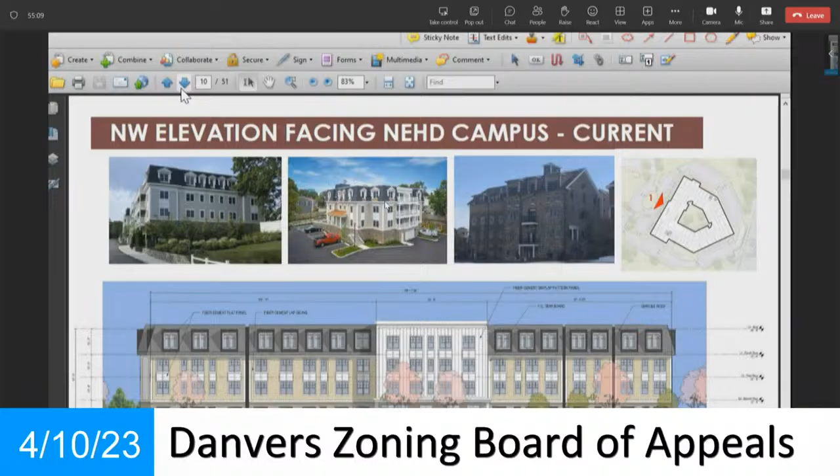Now we're moving counterclockwise. This is where, left to right, you see the 4-story portion of the building step down to 3. This is again the elevation you saw last month, and you'll start to see on the next slide how we began to turn the language.

We're having a continuity of detailing here on the 4-story on the left side of this elevation, with a similar treatment in trim boards, panels between windows, fascias, and the base. We're changing the colors a little bit to help manage the size of it as it turns, and as that change in wall plane occurs between the yellow and the white on the left.

You can start to see how we've changed our approach to the 3-story portion on the right side, and I'll dig into that a little more on the next elevation.

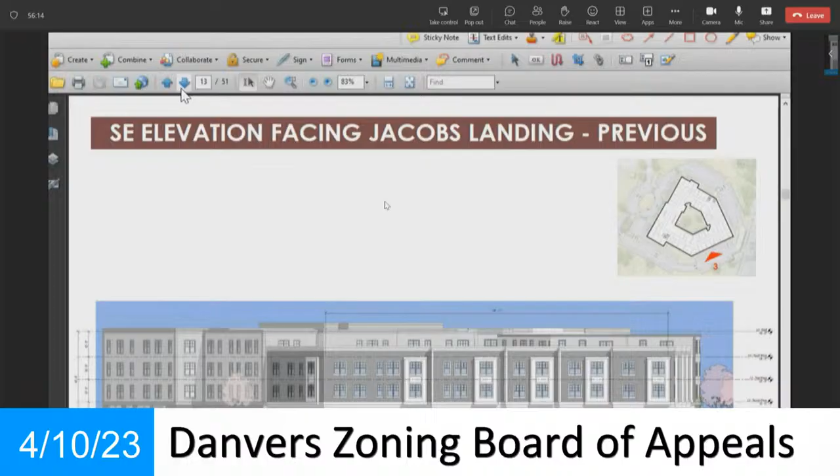This is turning the corner, so this is the side really facing Jacob's Landing. I think we heard a lot about these finned elements, these angled walls and the repetition of them, and how they started to feel a little monolithic, especially because of the shared roof line of the cornices. So on the next slide, I can dig into our new approach here.

As we turn to the next elevation, this is just turning that corner. You can see the 3-story portion terminate and step back up. This is the old elevation again. On the next slide, you can see how that 3-story portion comes and meets, and the building steps back up as it reaches the riverside, and we pick that language back up from the NEHD elevation.

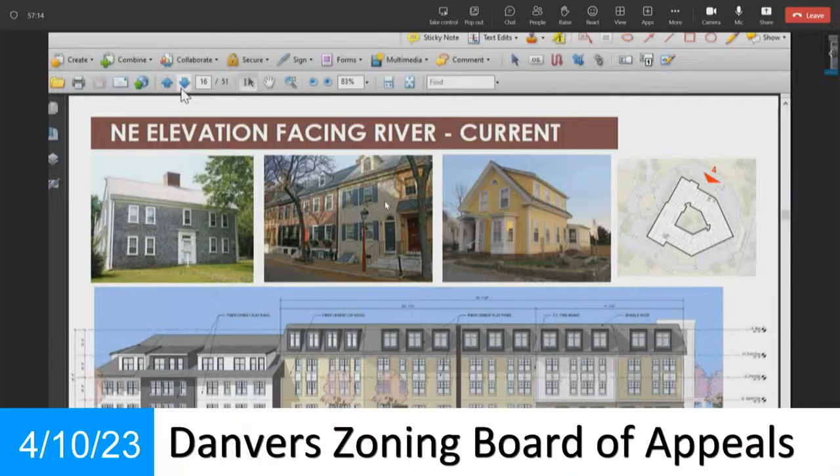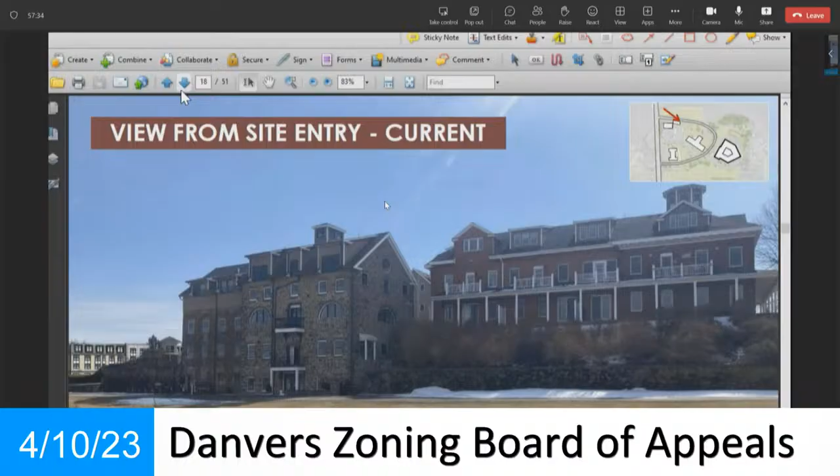On the next slide, you can start to see the heightened relationship of the roof line. A lot of these pitched gambrels and shed dormers that you see on these two foreground buildings, you can make out in the background there. So you can get a sense of the lack of height impact, as well as the kind of continuity of the roof character.

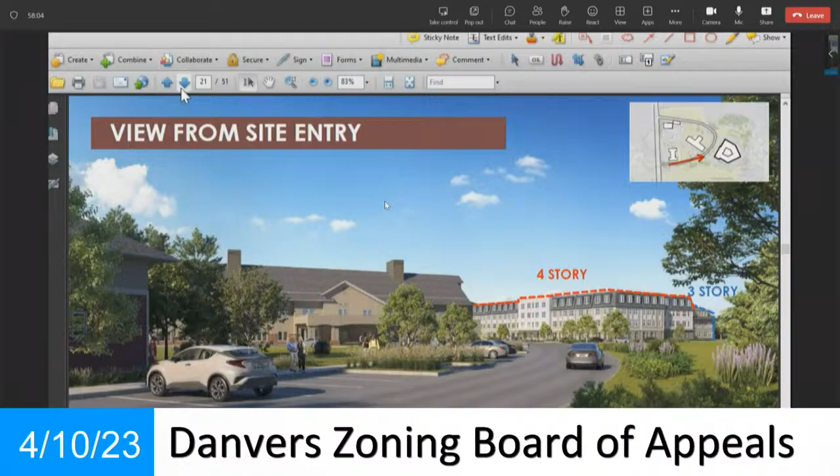This is the old site entry view. I won't dwell on this too long. Thanks, Brian. So this is the campus, with the nursing home in the middle foreground here. We just wanted to outline for you the difference between the 3 and the 4-story portion as we move up to the next slide.

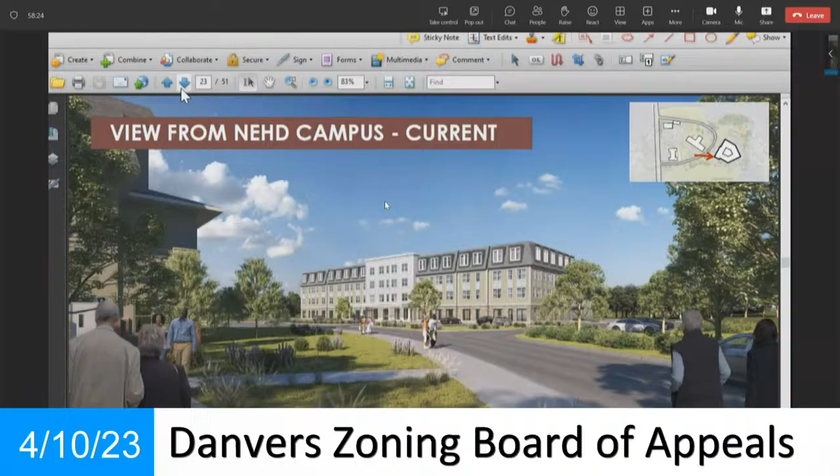You can get a little bit more of a feel for how the form's looking, the massing, the sloping of that 4th-story wall to make that gambrel roof, the materiality, the shiplap in the middle, the fieldstone on the base, the trim board detailing. All these subtle things, we're trying to create meaningful connections to what is in the area.

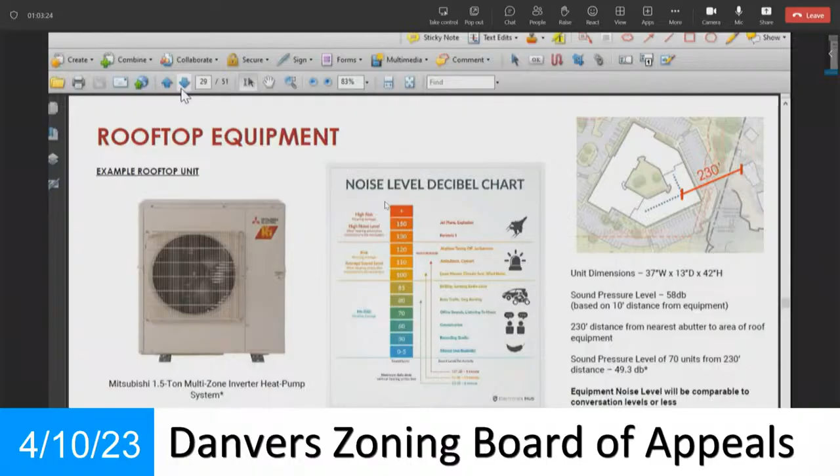And just to be clear, none of these are shown in the current renderings? No. And about approximately how many of these would be on the rooftops? There will be one for each unit, 140.

So the entire roof is going to be populated with these? In the center of the roof, yes. Especially because the building is so wide, they won't be visible from the ground. And again, they will be behind—

They'll be behind— can you please hold your comment, please? Thank you. Again, in those renders on the Jacob's Landing side, it's behind the pitched roof. So the portion behind the pitched roof is a flat roof a level below, so all the equipment's kind of hidden there. And the third story is units, you said? Yes. And there's an opportunity to screen them as well if needed? And we're already doing that. Okay, thank you.

Yeah, Brian, could you pull up the Jacob's Landing new render, please? I'll try to take the mic here.

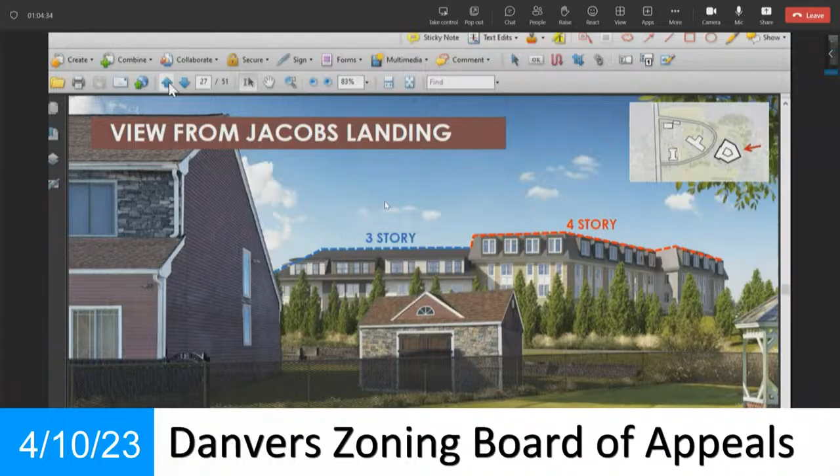So this third-story pitched roof, the depth of that roof is half of the width of the building. Behind this is a flat roof at about this level, and that's where our equipment is located. So it'll be down below, behind everything you're seeing here. Okay, thank you.

I think we're good to jump ahead, Brian. I think that was just about all we had. Yep, I think we just wanted to end here and give it back to the board for questions. Thank you, very good.

Anybody, questions on the architectural plan? Katie, Corrine? Ken, you good online there? He's still with us, I hope. Okay, next.

I think that's it for us. We are happy to answer any questions that you may have. We do have our full team here, and we can answer any questions with regard to the project, with regard to our responses, what we are seeking from a zoning standpoint as part of the application.

All right, thank you, Attorney McCann. I'm going to hold my questions to the end, hoping most of my fellow board members ask them for me, so I'll start down there with you, Jeff. I have no questions, Mr. Chairman. That's not a good start, come on.

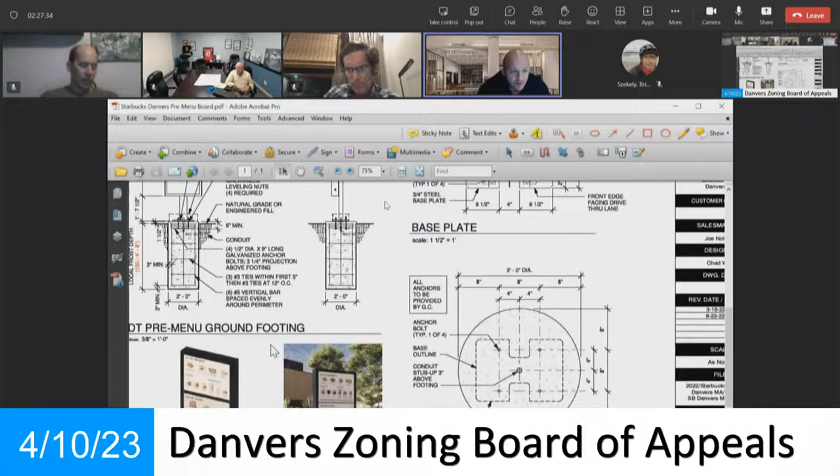Were you able to review the last meeting, and do you feel like you can speak to some of the questions that came up from this board? Yep, I watched the video. I have answers to any questions that the board has. [audio breakup] Could you repeat that? We had a little audio breakup. Yeah, I was able to watch the video from the last hearing. I understand the questions, I have answers to those questions, and if the board has any other questions for tonight, I am prepared to answer those as well.

Yeah, why don't you just bring us through what we already asked and update us. Okay, so I believe one of the questions was the amount of cars in the car line and the stack. The Y lane will create between 15 to 16 cars in total before the tail gets out onto the ring road of the plaza, where the other drive-through for the clothing drop-off center is. So we're trying to keep the cars off of that ring road.

As far as clarity to what's on the pre-menu boards, they're the all-day breakfast sandwiches. You'll have hot beverages, cold iced beverages, and on the bottom screens you'll have the anytime bakery and the all-day lunch specials. So the theory behind the pre-menu boards is as the customer's waiting to approach the order point, they can start to understand what they want to get, see what's being offered, so when they get to the order point, they're not taking that time to look at the menu board, which is placed at the location on the screen that just came up. And that would help push the cars forward.

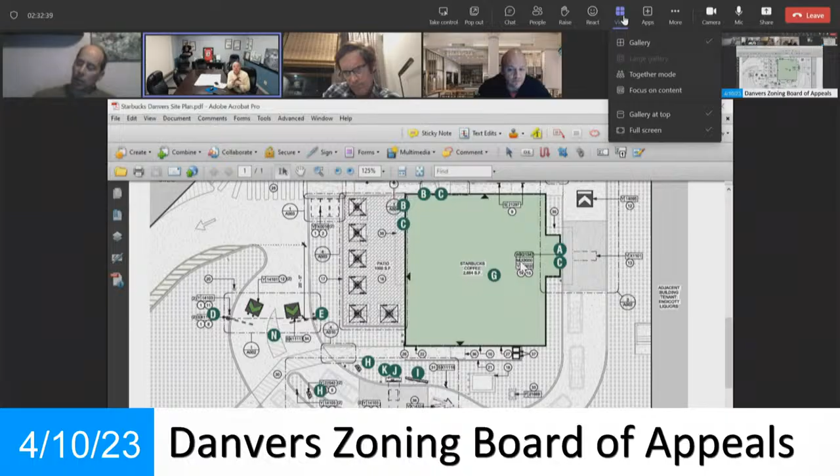To your point, what we found out and observed, and what the planning board mentioned to us, is that usually on the weekends is where the Savers pick up and drop off area is busiest. So taking that into account, along with the Starbucks operation, what we have done is find one distinct point to go either towards Starbucks, straight through into the drive-through lane to get their order, or slightly to my left, your right, to go through the pickup and drop-off lane.

What we did is size the opening along the Mall Ring Road, just a little bit above that plan, to have sufficient width to allow the traffic to make those moves without conflicting with each other. We have also doubled up the drive-through, or drop-off lane for Savers, to be 2 lanes where there could be 8 cars in line before it gets back out to where you see the crosswalk that connects the Savers sidewalk with the Starbucks sidewalk.

So we believe we've mitigated the question that was asked by planning. It was a concern for them. We believe we have the appropriate traffic control measures in place to segregate Savers traffic from customer traffic for Starbucks.

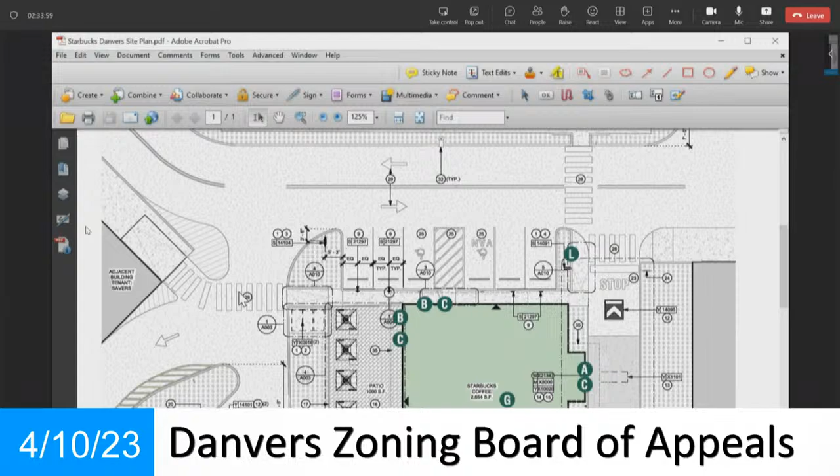So if I understand correctly, your site just opened this past weekend? Friday morning we opened, yes. And you mentioned there's 2 order takers, and you got queuing of 16 cars, correct? That is correct. And I imagine there's a certain amount of time you'd like to see orders go through, do you have that? Like, is it a minute? Under a minute? 5 minutes? What is it?

Under a minute is preferable, the faster the better. It all depends on the orders - if it's a combination of hot food, custom beverage drinks, or just a drip cup of coffee, that's how the time varies. The goal is definitely to be below a minute from order to pickup.

Okay, so I'm just trying to understand what does this pre-menu board buy you? I guess I don't see the value in it, but I'm going to let you tell me what Starbucks sees in it, and how in a perfect world it works.

Yep, so like what I said earlier, in the perfect world, as you approach the pre-menu board, you're pondering your thoughts on what you want for a beverage, sandwich, pastry, whatever it may be. By the time the car in front of you at the order location pulls forward, you've now seen the menu, and that saves time because hopefully you already have your thoughts together to place your order, versus getting to the order point and then looking at the menu. It's those few seconds we save while the car in front of you is ordering that you're starting to see the pre-menu.